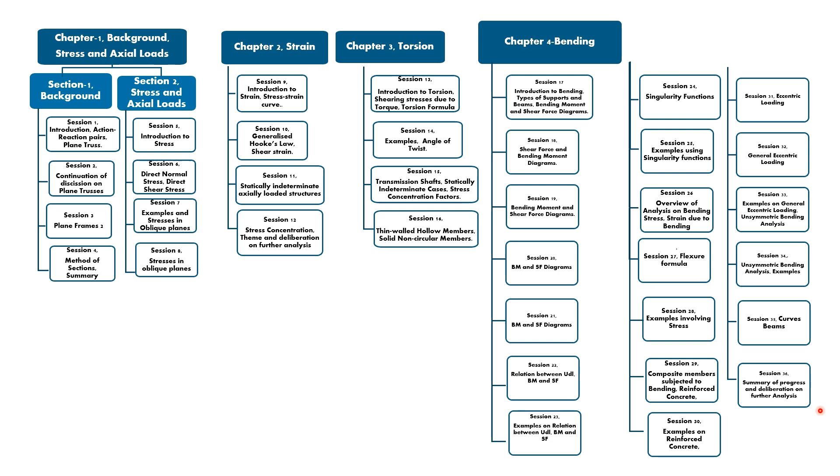We have covered shear and also transformation of stresses and strains. We now look at failure theories. In this session, we cover 3 of the failure theories. In the next session, we'll cover the 4th theory and then look at examples.

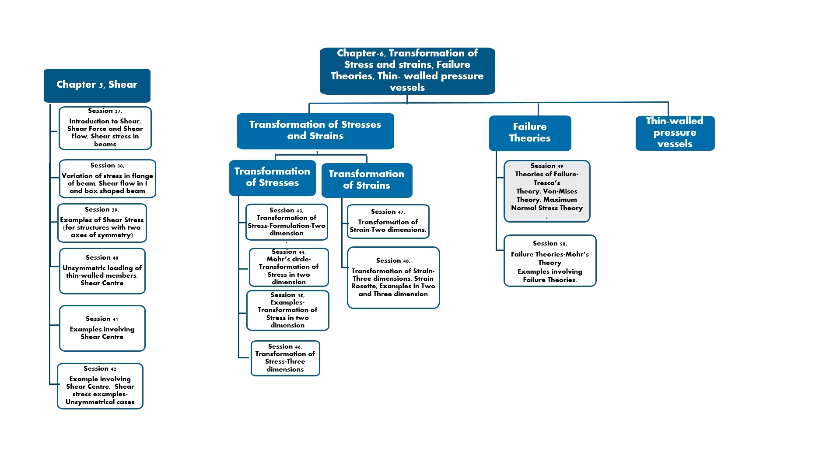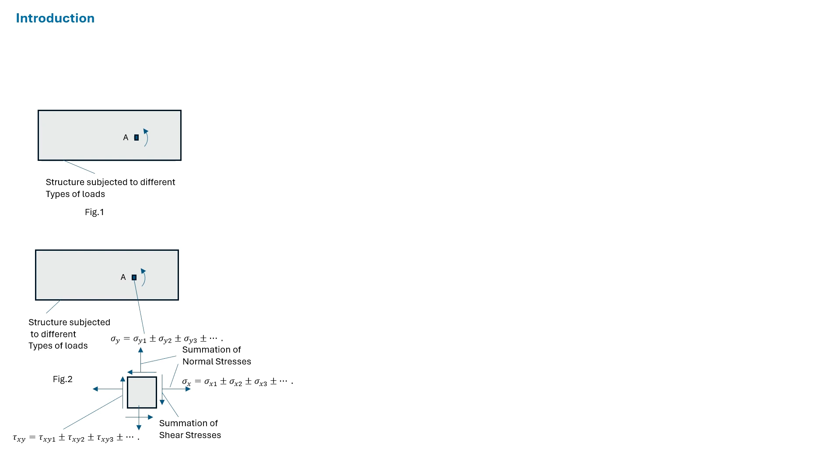We mentioned about theories of failure at the end of chapter 2 and the end of chapter 4. The normal stress theory and the shear stress theory has been used throughout starting from chapter 1. For bars subjected to axial loads, we have used normal stress theory. For circular bars subjected to torque, we have used shear stress theory. For beams subjected to transverse loads, we have used shear stress theory for shear and normal stress theory for bending.

Now let us consider a structure subjected to different types of loads. Consider a point A for which this element is shown. In general, this element will be subjected to both normal stresses and shear stresses. If we rotate the element, then at a certain stage, it will be subjected to principal stresses.

The principal stresses can be tensile principal stress and compressive principal stress. With rotation of the element at a certain stage it will also be subjected to the maximum shear stresses. Now, such rotation of element can be carried out for all points in the structure. We can then find the absolute maximum tensile principal stress and the absolute maximum compressive principal stress.

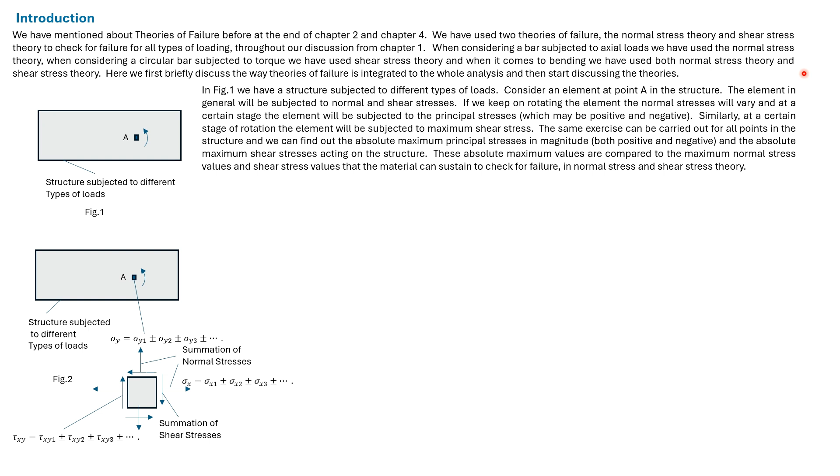These stresses can be compared to the allowable tensile stress and the allowable compressive stress to check for failure. Also, we can find out the absolute maximum shear stress acting on the body. This stress can be compared to the maximum allowable shear stress to check for failure.

For cases considered so far, all the absolute maximum principal stresses were found in sections perpendicular to the axis of the member. For members subjected to axial loads, any perpendicular section within a portion could be taken, and any element within the sections gave us the absolute maximum principal stress. With torque, also, any perpendicular section could be taken within a portion. Any element on the surface gave us the absolute maximum shear stress.

With bending, at least in certain cases, only one perpendicular section was related to the absolute maximum principal stress. However, here also there was a group of elements that was subjected to the absolute maximum principal stress. The scenario with shear stresses in beams was similar.

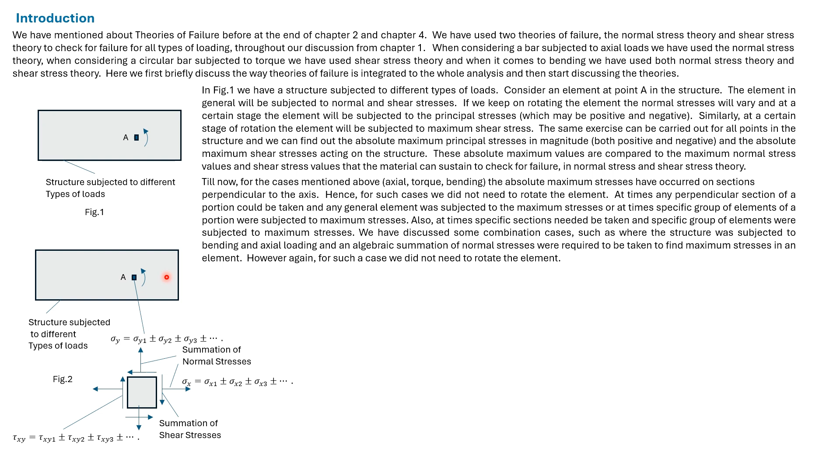This element can be rotated and we can find the principal stress. As such, we can find the absolute maximum principal stress in tension and absolute maximum principal stress in compression. Similarly, we can find the absolute maximum shear stress. They can then be compared to the allowable values. For this general case, commonly rotation of the element will be needed.

We have just studied transformation of stresses, and it will be put to use with theories of failure. In this session, we'll study maximum shear stress theory or Tresca's theory, von Mises theory or maximum distortion energy theory, and normal stress theory. We'll compare the theories with experimental results. In the next session, we'll study Mohr's theory. We'll also look at examples related to different types of theories in the next session.

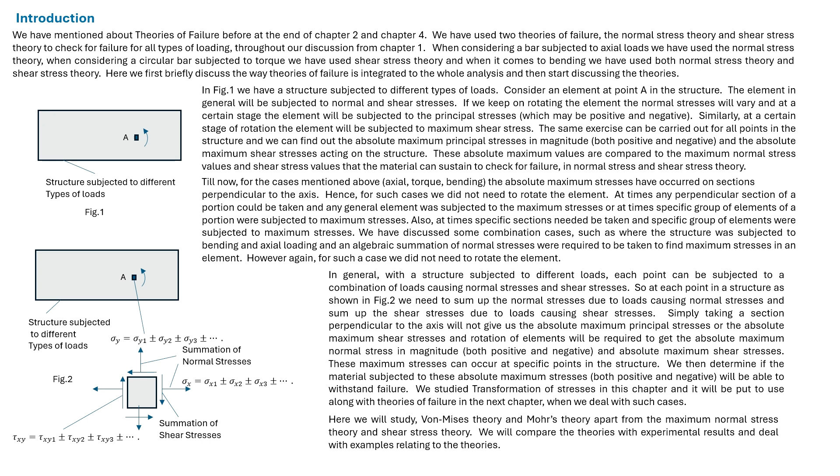So in this slide, we have briefly discussed the way theories of failure are integrated to the whole analysis. We now start discussing the theories.

Different failure theories have been developed by observing different kinds of materials. There are theories developed by observing failure of ductile materials and theories that apply well to brittle materials. We discuss here two theories obtained by observing ductile materials: the maximum shear stress theory or Tresca's theory, and the maximum distortion energy theory or von Mises theory.

Failure in ductile material often occurs by slip along shear planes. We earlier developed Mohr circles for such an element. Let us consider the stresses on the right face of the element are plotted here, and the stresses on the top face are plotted here. Joining these 2 points gives a diameter of the Mohr circle. If we rotate the diameter, we get the whole Mohr circle.

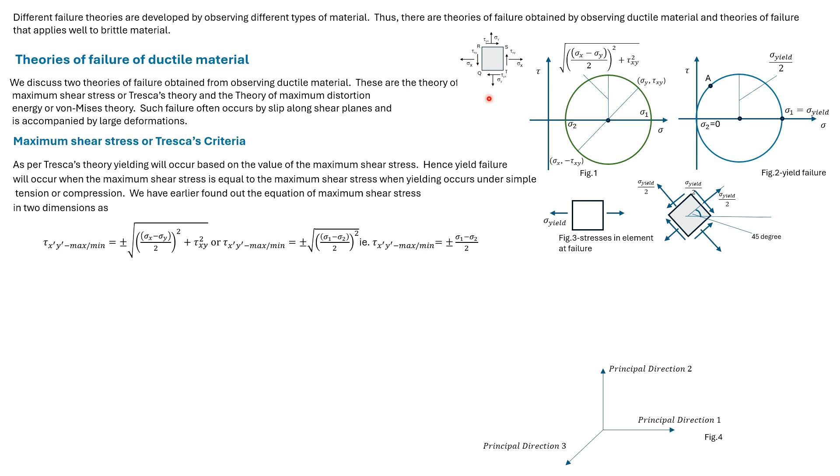As per Tresca's theory, maximum shear stress decides when yielding will occur. Consider a body subjected to tensile stress only. As per Tresca's theory, yielding in a given body will occur when the maximum shear stress equals that of a body yielding under tension.

Consider sigma 2 is 0 and only tensile stress acts on a body. So we'll follow the normal stress line and the body will yield when sigma 1 is equal to sigma yield. We can develop a Mohr circle as shown, and we can see from it that the maximum shear stress then will be sigma yield divided by 2.

We can see the same thing from this equation with sigma 2 equal to 0 and sigma 1 equal to sigma yield. If we look at elements, this element corresponds to this point, and this element corresponds to the maximum shear stress of this point. As per Tresca's theory, this element gives us the criteria, not this element.

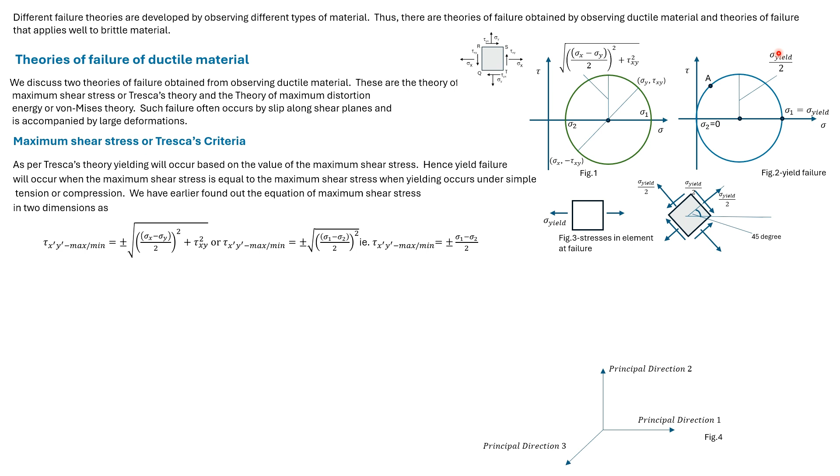Here we need to understand two differences that are particular to this chapter. The Mohr circle drawn here is not related to failure; it can be for any stressed element. If the element is rotated, we get this Mohr circle. This Mohr circle, however, is related to failure. Such Mohr circles related to failure will be commonly seen in this chapter.

Consider a stressed element with stresses given by point A. As the element is rotated, it will attain these stresses, so point A does correspond to failure. Also, in previous discussions, we have considered sigma 1 as the maximum principal stress and sigma 2 as the minimum principal stress.

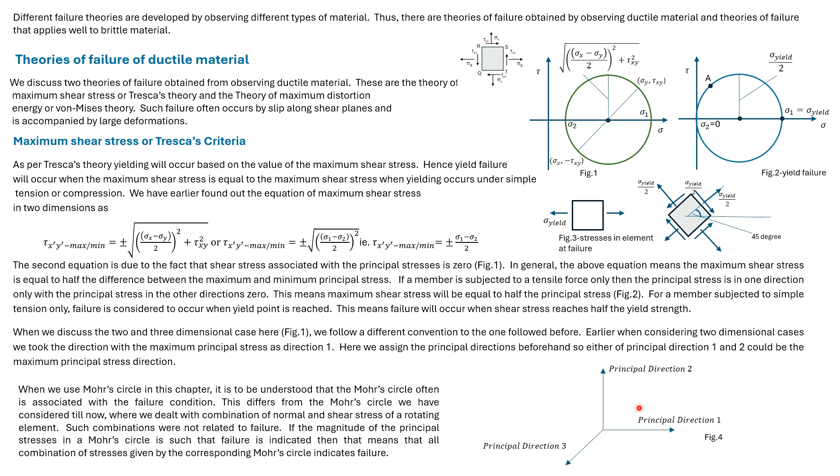Here, the principal directions are fixed beforehand, so sigma 2 can be the maximum principal stress and sigma 1 the minimum principal stress as well. As earlier mentioned, the criteria of failure as per Tresca's theory is that tau max is equal to sigma yield divided by 2. As can be seen from any Mohr circle, the difference between the principal stresses is equal to twice tau max. So one can interpret the criteria for failure as the difference between the two principal stresses being equal to sigma yield.

So for the three-dimensional cases, we get sigma 1 minus sigma 2 is equal to plus or minus sigma y. Sigma 2 minus sigma 3 is equal to plus or minus sigma y. And sigma 3 minus sigma 1 is equal to plus or minus sigma y.

However, as earlier, we are interested more in the cases with sigma 3 as 0. Considering sigma 3 is equal to 0, we get 6 sub-cases of Tresca failure criteria. We'll discuss them one by one. For all these 6 cases, the overriding criteria is obviously that tau max is equal to sigma yield divided by 2, and that is when failure will occur.

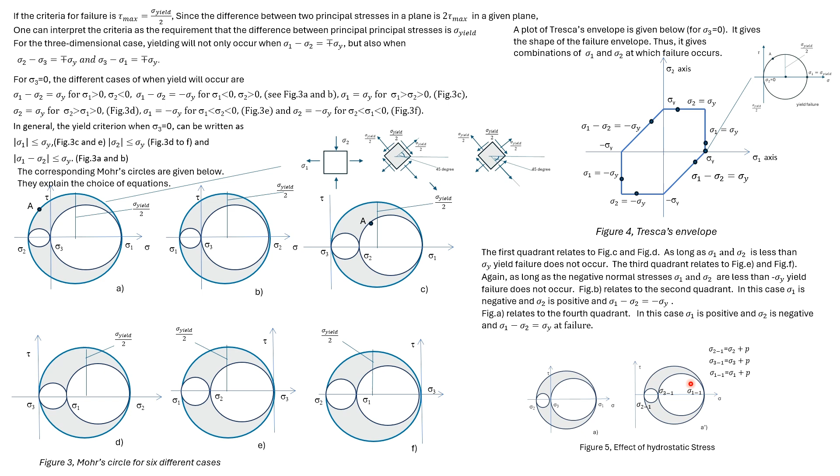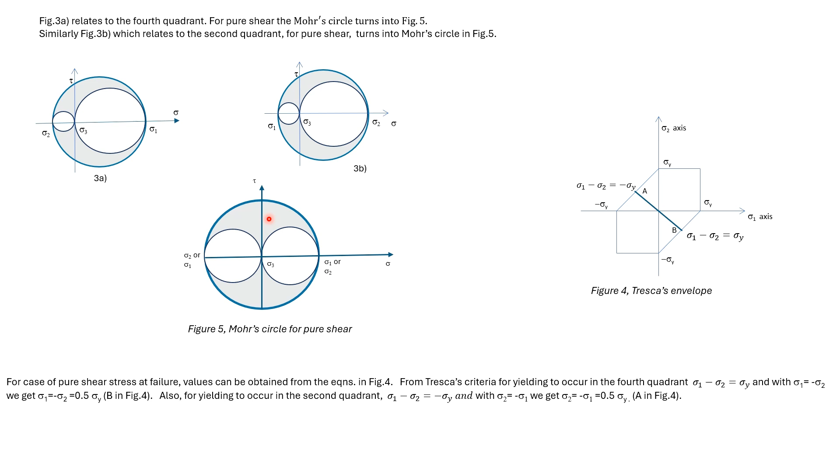We now look at von Mises theory. It is also referred to as maximum distortion energy theory. There is another theory, the total energy theory. In order to understand maximum distortion energy theory, we need to understand total energy theory. So here we explain total energy theory first.

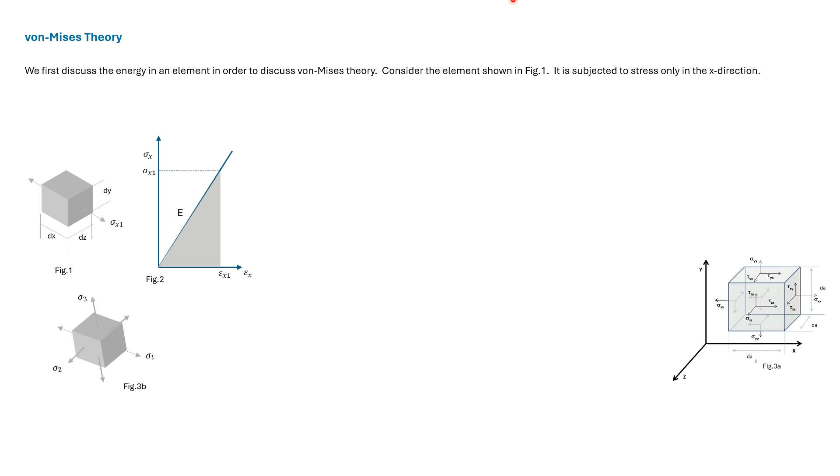Here we have an infinitesimal cube subjected to a stress sigma x1. Let the strain corresponding to sigma x1 be epsilon x1. The stress is increased gradually from 0 to sigma x1, and the strain increases to epsilon x1 from 0. As per Hooke's law, the stress-strain curve is linear. The modulus of elasticity E is the slope of this straight line.

Now the total strain energy imparted by this stress is half force into distance. The force is sigma x1 dy dz. So this is the force. The distance is epsilon x1 into dx. So the total elastic strain energy U is half sigma x1 epsilon x1 dx dy dz, or half sigma x1 epsilon x1 dv. If dv is 1, then this shaded area gives the total strain energy.

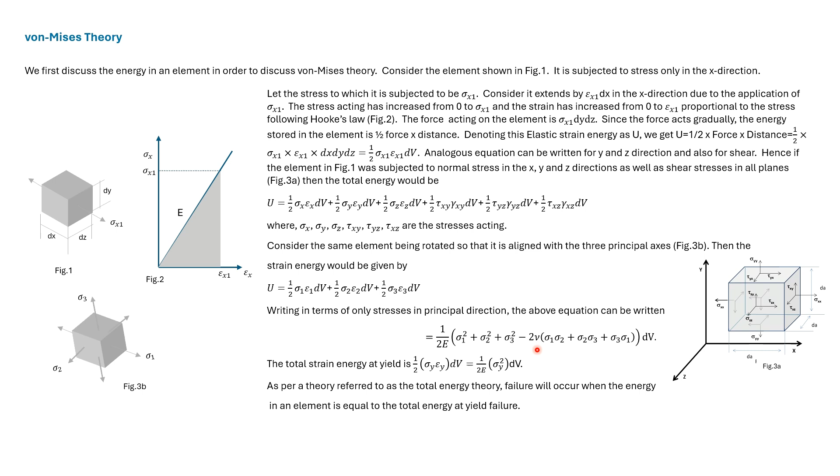As per total energy theory, when the total strain energy as given by this expression equals the total strain energy at yield, then the element fails. Equating the two expressions, we get this equation which gives the failure criteria according to total energy theory. This failure criteria is in 3 dimensions. If we have sigma 3 as 0, then we get this equation which is for the biaxial case.

These are the stresses that will act on an element. Generally, the total energy of the element can be divided into 2 portions. One portion of the energy of the element is taken up by volume change of the element. The second portion of the energy is taken up by distortion.

As per von Mises' theory, it is the distortion portion of the energy that is responsible for failure. Experimental results show that hydrostatic pressure has no effect on the failure of metals. We earlier saw that Tresca's failure criteria is aligned with this fact, since a change in hydrostatic pressure does not affect it. Hydrostatic pressure causes only volume change, so von Mises' theory is also aligned with the fact that hydrostatic pressure will not affect failure.

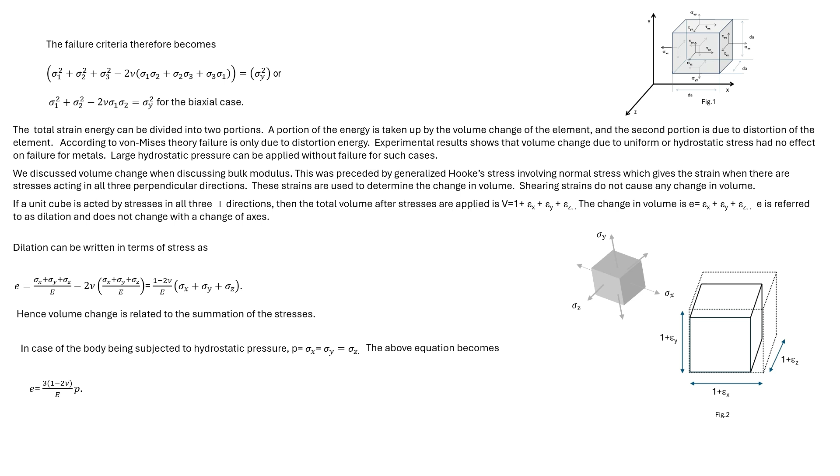Consider an element subject to general stresses. Let us rotate this element so that it is aligned with the principal directions. Then it will be subjected to principal stresses, which we can designate as sigma 1, sigma 2 and sigma 3.

Let us denote sigma 1 plus sigma 2 plus sigma 3 divided by 3 as P, the hydrostatic stress. We then consider that sigma 1 consists of P and some other stress, similarly with sigma 2 and sigma 3.

So we can write sigma 1 is equal to P plus sigma dash 1, sigma 2 is equal to P plus sigma dash 2, and sigma 3 is equal to P plus sigma dash 3. Now from the very definition of P, we get sigma 1 plus sigma 2 plus sigma 3 is equal to 3P.

Now substituting these values, we get 3P plus sigma dash 1 plus sigma dash 2 plus sigma dash 3 is equal to 3P, which means sigma dash 1 plus sigma dash 2 plus sigma dash 3 is equal to 0.

Now we earlier saw that dilation depends upon the sum of the stresses. So if the sum of the stresses is 0, then there's no dilation, and this means that there's no volume change.

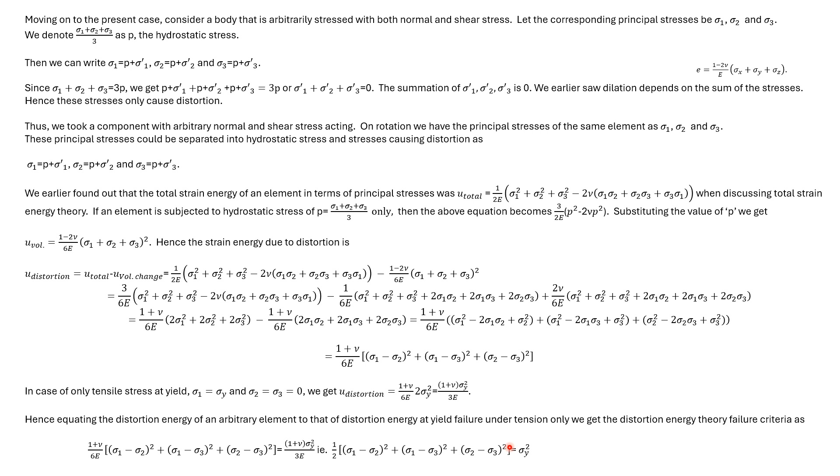So von Mises theory is half bracket sigma 1 minus sigma 2 square plus bracket sigma 1 minus sigma 3 square plus bracket sigma 2 minus sigma 3 square is equal to sigma y square. The biaxial case with sigma 3 equal to 0, von Mises criteria is given by this equation, which can be written in this form.

The failure envelope for von Mises criteria is in the form of an ellipse with AB the major axis and CD the minor axis. For the positive portion of the sigma 1 and sigma 2 axes, the von Mises envelope, like the Tresca envelope, passes through the point sigma yield. For the negative portion of the sigma 1 axis and the sigma 2 axis, also the von Mises envelope, like the Tresca envelope, passes through the point minus sigma yield.

Now consider a point P on the failure envelope. This point P corresponds to principal stresses, which we can take as sigma 1P and sigma 2P. As we earlier saw with the Tresca criteria, a point P corresponds to a whole Mohr circle. So for this point P, we can first form this Mohr circle, from which with sigma 3 equal to 0, we get the other two Mohr circles.

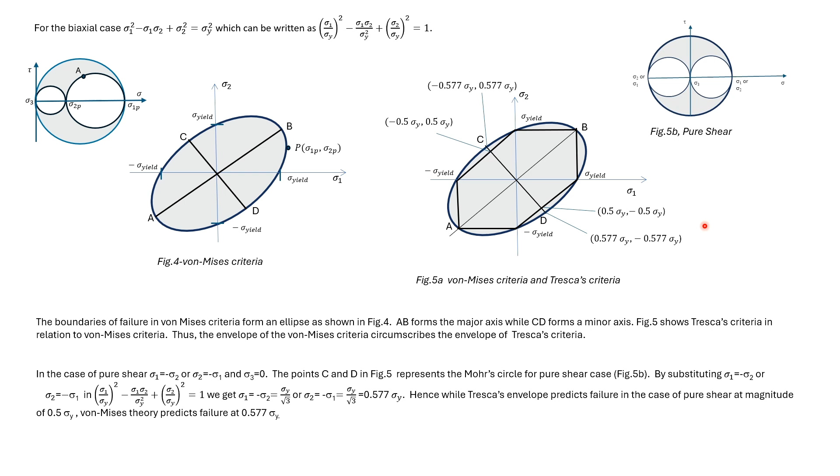Till now, we have discussed two theories of failure related to ductile material. We'll now discuss two theories of failure related to brittle material. These are maximum normal stress theory and Mohr's theory. Maximum normal stress theory will be discussed in this session and Mohr's theory in the next session. As mentioned, we have used normal stress theory earlier in different chapters.

One issue would be confusing. Earlier, when dealing with normal stress theory, it was not mentioned that we are dealing with brittle material or ductile material. Similarly, with shear stress theory, normal stress theory was used in relation to metals, which are ductile normally. This confusion will be cleared up at the end of this session.

With normal stress theory, if the maximum principal stress exceeds the ultimate strength of the material, then the material is considered to have failed. Normally, we use a factor of safety. The ultimate strength of the material is divided by the factor of safety to get an allowable value of normal stress that can be used.

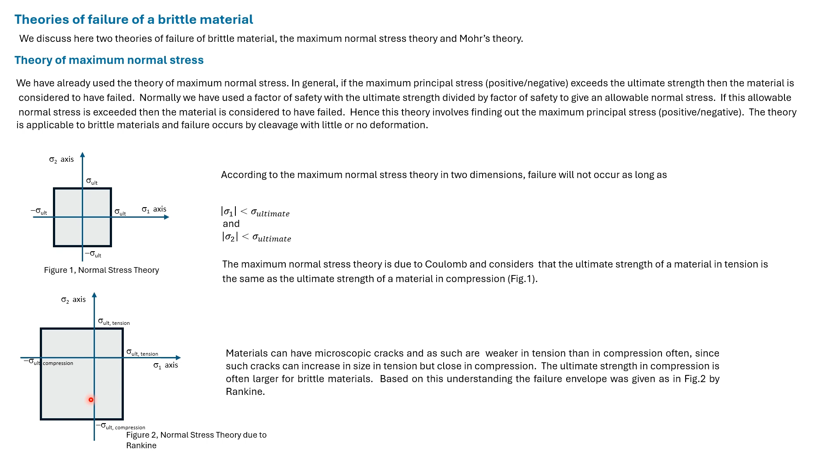Here we compare experimental results with the theories. This helps us understand the validity of the theories. These are the classical results of Taylor and Quinney. They carried out experiments on tubings in isotropic conditions. The tubings were subjected to tensile stress and torsion. Due to tensile stress it was subjected to normal stress, and due to torsion it was subjected to tau. Sigma 0 here is the yield stress. The materials considered were copper, aluminum, and mild steel.

These are the envelopes due to Tresca and von Mises. One can see that von Mises criteria correctly predicts the yield strength, and Tresca's criteria is slightly conservative.

Here, maximum distortion energy theory, maximum shear stress theory, and maximum normal stress theory have been compared. Both axes are normalized. For von Mises and Tresca's theory, sigma 1 has been divided by the yield strength, and sigma 2 has been divided by the yield strength. For maximum normal stress theory, sigma 1 is divided by the ultimate strength and sigma 2 by the ultimate strength. As we can see, the von Mises theory correctly predicts the yield failure of ductile materials.

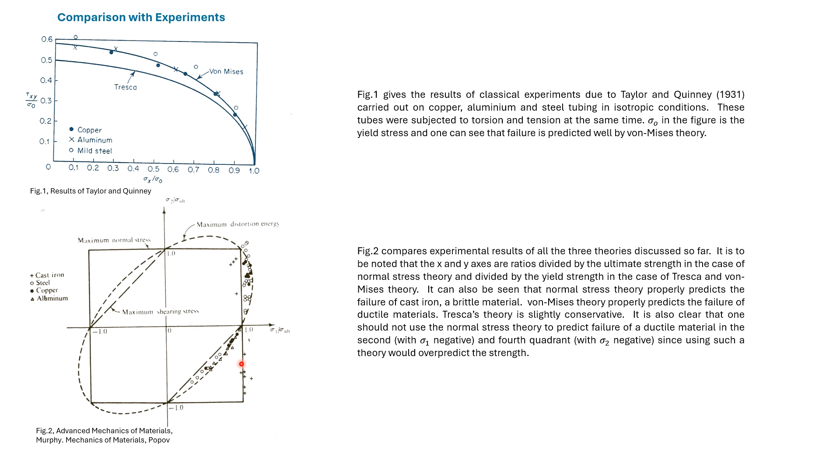When it comes to failure, there are two types of resistances: resistance to separation and resistance to sliding. Failure occurs depending on which type of resistance is weaker. Here we will discuss failure under tension compression and failure under torsion.

Consider tension compression. Under tension, a cast iron bar fails with a flat surface. The failure is related to principal stress. Also under tension, a mild steel rod fails by cup and cone fracture. This failure is related to shear. Under compression, duralumin fails at 45 degrees to the horizontal. Similarly, concrete fails at 45 degrees to the horizontal.